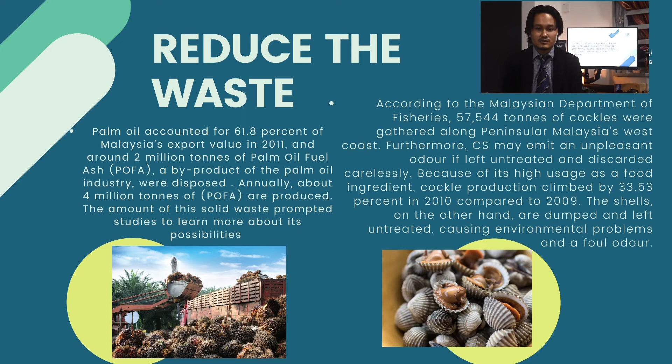Because of its high use as a food ingredient, cockle production climbed by 33.53% in 2010 compared to 2009.

For the reduced carbon dioxide emission: carbon dioxide emission, one of the cement industry byproducts, shows the influence of cement on the environment. The cement industry is one of the greatest carbon dioxide emitters.

Global carbon dioxide emission from cement manufacturing was 377 million metric tons of carbon in 2007. The amount of carbon dioxide emitted during cement manufacture and the process of cement hydration is roughly 900 kg for every 1000 kg of cement produced.

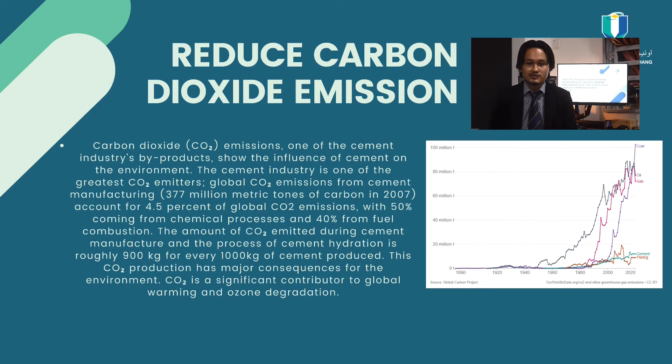For my research objectives, the first one is to determine the effect of water cement ratio on workability of mortar containing POFA and cockle shell.

The second one is to determine the effect of water cement ratio on compressive strength of mortar containing POFA and cockle shell. And lastly is to determine the effect of water cement ratio on water absorption of mortar containing POFA and cockle shell.

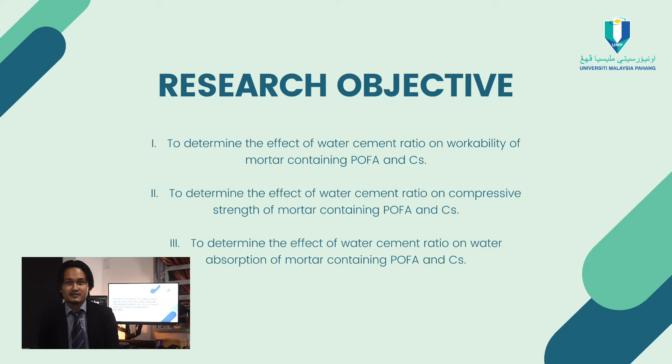For my significance of research, the first one is to reduce the cost of raw material in mortar production. The second one is to make better use of the waste material generated and to limit the amount of waste that ends up in landfill. And lastly is to develop environmentally friendly, long-lasting concrete in the construction industry.

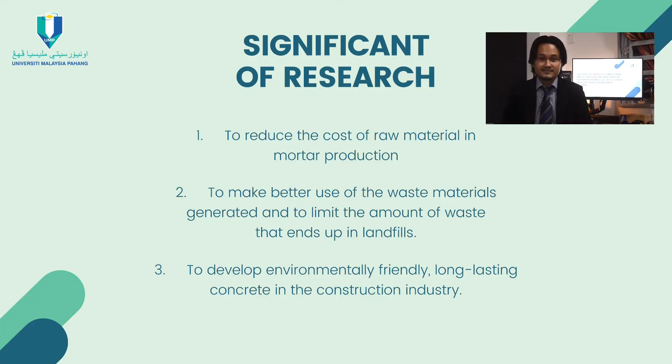For my literature review, this is my literature review for cement, this is literature review for sand, then for POFA, and literature review for cockle shell.

On my left slide is chemical composition of OPC and POFA, and on the right is chemical content of pulverized cockle shell.

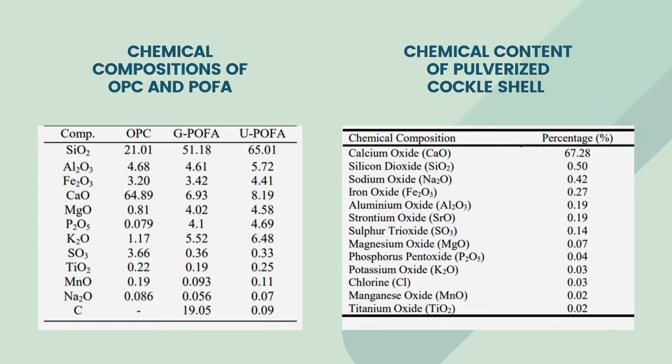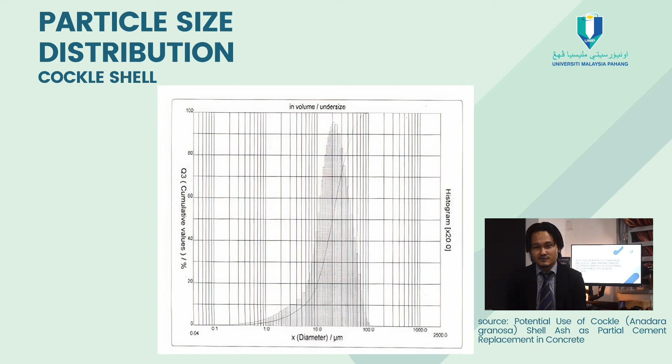For my gap of knowledge, the first one is most of the previous research recommends that the optimal replacement level of cement by POFA is 30 to 20%, and for cockle shell 20 to 10% respectively.

The second one is POFA consists of high silica oxide, which enables it to be used as a cement replacement or as a filler, while cockle shell contains 96% calcium carbonate that can be converted into calcium oxide, which can absorb carbon dioxide in the production of mortar.

The last one is the particle size of the mechanical ground POFA, ranging from 7.2 to 10.1 micrometers, was lower than that of cement, whose particle size range is 10 to 20 micrometers. The average particle size for cockle shell was 13.56 micrometer.

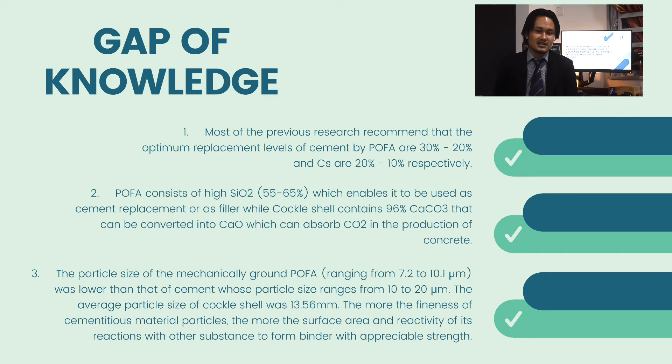For methodology, the mix proportion: the cube size that I will use is 50mm, and the sample is 36 cubes, containing 30% of POFA and 10% of cockle shell.

The cement sand ratio is 1/3, and water cement ratio that I will use is 0.3, 0.35, 0.4 and 0.45. The grade of mortar is 25 megapascal.

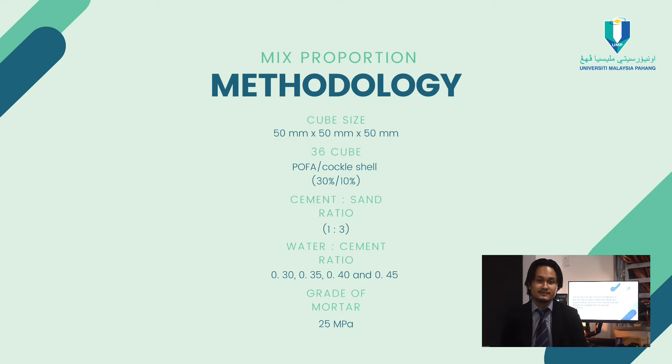This is my methodology of mix proportion. The water cement ratio ranges from 0.3 to 0.45, and the cement value is 612.

The water content is 183.6 to 275.4, and the sand is 884 kilogram per meter cube. For POFA, I will use 55.5, and the cockle shell is 18.5 kg per meter cube.

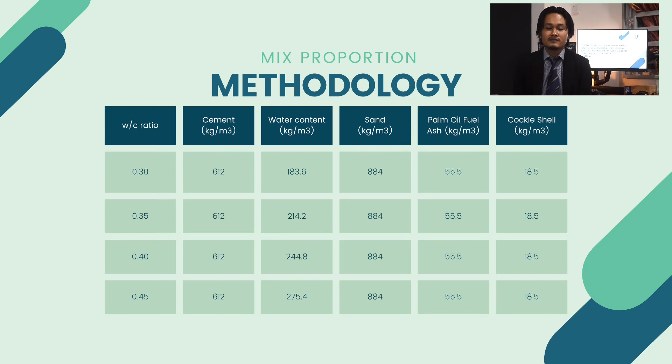For the lab test, first is flow table test. The aim is to determine the effect of water cement ratio on workability of mortar containing POFA and cockle shell.

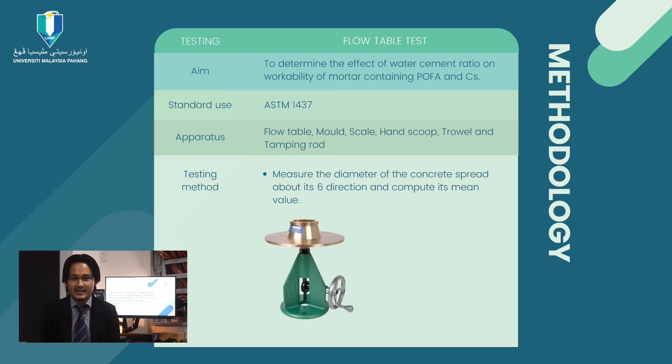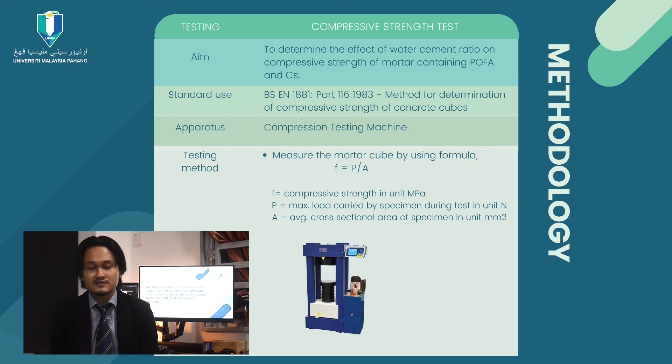Next test is compressive strength test, to determine the effect of water cement ratio on compressive strength of mortar containing POFA and cockle shell.

And the last test is water absorption test, to determine the effect of water cement ratio on water absorption of mortar containing POFA and cockle shell.

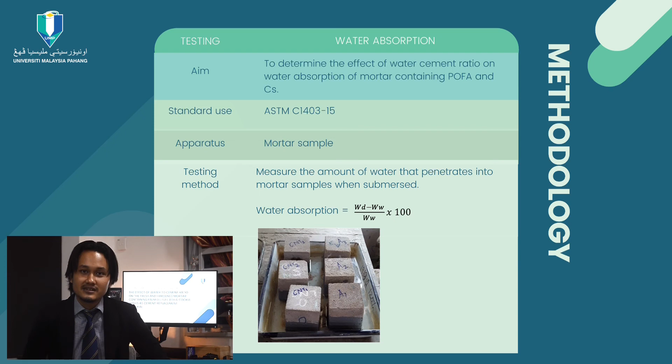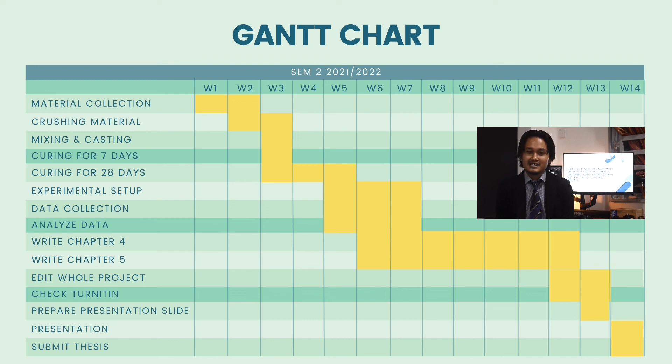This is my Gantt chart for Semester 1, FYP 1. This is the Gantt chart for FYP 2 at Semester 2.